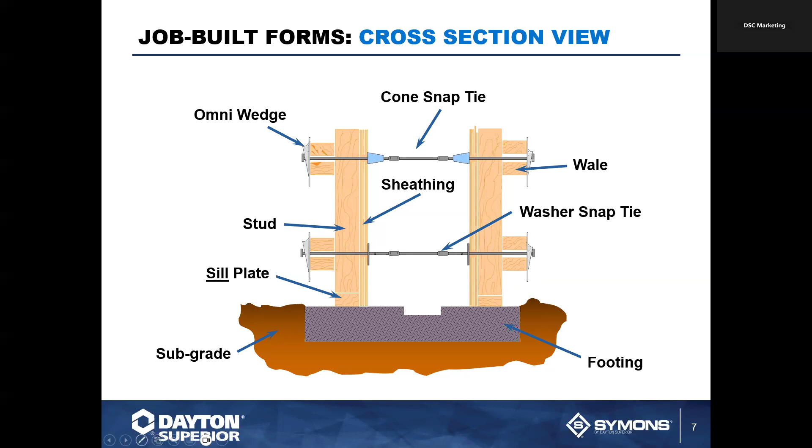Walers and strongbacks - all of these systems we talked about, whether you're talking about the 3/4 inch plywood, the studs, or the wales, they are all called load gathering members. What they do is take the pressure that occurs when you're pouring concrete within the form. You've got to consider the concrete form is the mold of the concrete, so that mold, when you're pouring concrete in, is going to want to push outward, away from where the concrete is being dumped into it. So that's going to create pressure.

The plywood gathers that pressure and transfers it to the stud, and the stud will transfer that to the waler. The waler is going to transfer that load to the tie through the omni wedge in the back that's holding everything together. So the tie will actually be what's supporting all the weight that's pushed on it - it's just that the lumber is all what they call the load gathering parts of the system.

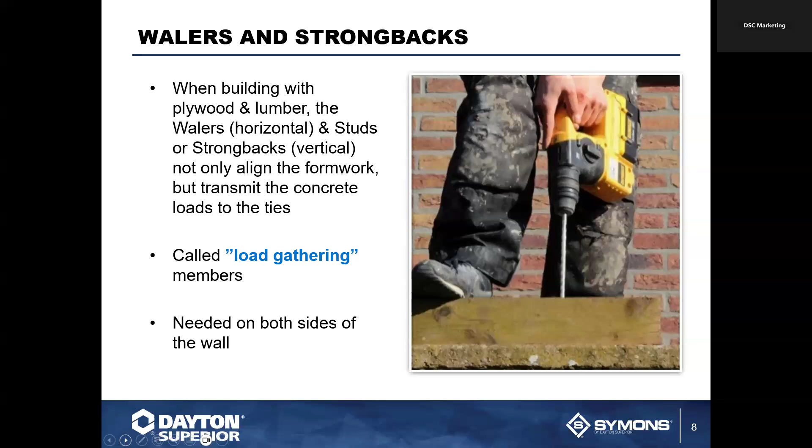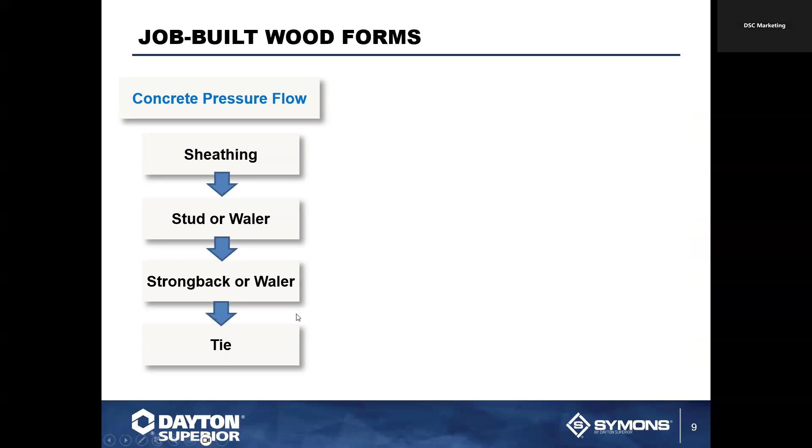Basically, as we talked about, your concrete pressure flow is going to go from your plywood to your stud or waler to your strongback or waler to the tie. This is known as your concrete form pressure. Whether you have either a stud and a wale or a wale and a strong back, both systems are totally acceptable in the marketplace.

It all depends - it's contractor preference, which way he wants to go, how he wants to form things up. Myself, I grew up as a stud and wale guy. Most of my jobs all had studs and wales on them. So, like I said, it's contractor preference.

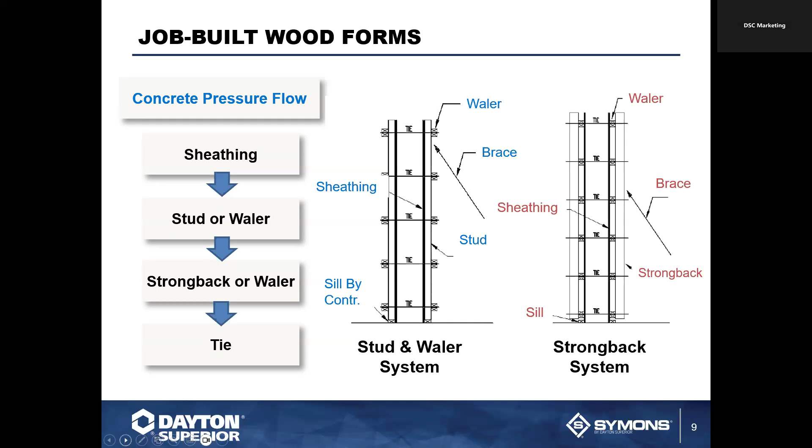On the snap ties, you've got a bunch of different varieties. Most snap ties in today's market typically have a hex head or a penta head on the end, so you can actually use a wrench to break it back.

Now you see those two little flat spots in the form - those are called anti-spin devices. That means once you pour your concrete and it gets hard, you take a wrench - I like to use either a pair of plier vice grips or a plumber's wrench - basically put it on the end of the snap tie and spin it around to snap off the thing. Those anti-spin devices hold the tie in the wall sound, so it will not continually spin. So it will break off.

Now, snap ties are always given a break back, and that is just a little indentation in the wire, or a weak spot, so that when you twist the wire, that area will break first. And that's where your tie will actually give you the break back from the wall surface.

You also have the availability of doing a Jahn forming system. Jahn forming systems are a great system. Typically, you're going to use short end snap ties. You're going to use a standard duty tie with the Jahn system because it is only a 2,250 pound system. But you can also have a heavy duty tie for other systems when you're using like the Omni wedge and other systems available.

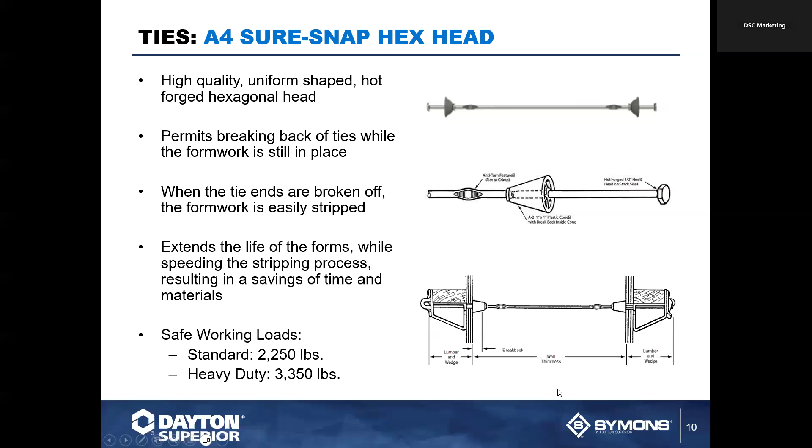The Jahn system, as we referred to, we talked about a little bit here. It is light forming, primarily uses the Dayton short end snap ties, a tie wedge, or Jahn clamps. Now the Jahn clamps typically have to be used with light duty ties because the eccentric on the back there, since it is pressed and heat pressed, is only good for about 2,250 pounds. The tie wedge, on the other hand, can accommodate up to 3,350 pounds.

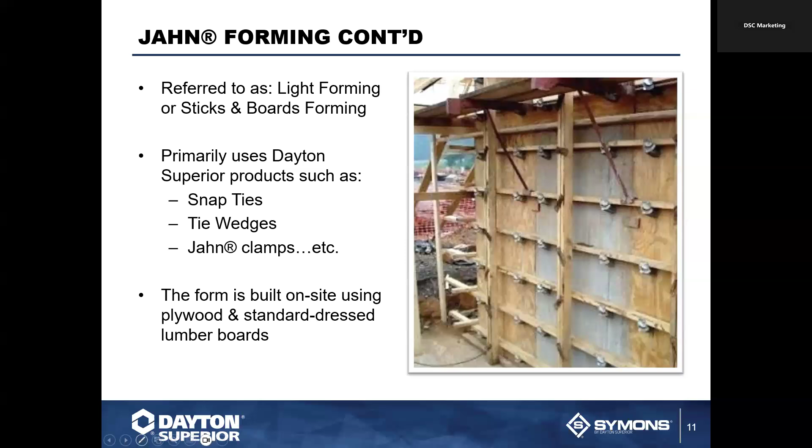The Jahn system primarily is a single waler system. So basically, you're going to put the tie through the plywood once you drill your holes, attach a Jahn A bracket to it, and then put the 2x into it. That 2x will actually carry the load.

Now, it's recommended that every 8 foot you put a strong back, and strong back just basically ties all of the ties in the wall form together, so it's going to help keep it in alignment vertically. I strongly recommend using a strong back at a minimum of every 8 foot.

With the Jahn system, you're going to have a grand total of probably a handful of nails on the project. It's one of those that's called loose sticks and boards for a reason, because you don't have to attach anything with nails. But in certain applications, especially on the outside of the form where you run your walers by and across each other, you're going to want to drop a nail down through the boards to make that connection in the corners.

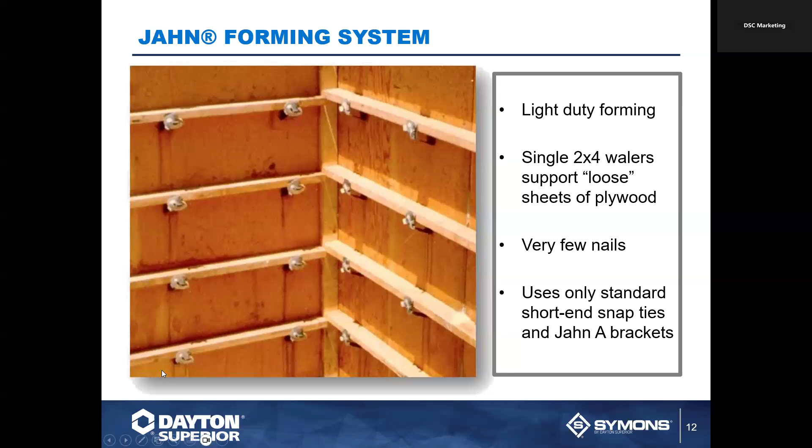Now we also have the Gates system, or the Sherlock system, as we call it here at Dayton. This system uses a little bit different fixture than the snap tie. You see the snap tie there with the break back, the anti-spin, and the long end, and then the hex head. Well, the Sherlock tie is a product very similar.

If you hear the word Gates Camlock, they were the originator of this system. We came up with the Sherlock system about 3 years later. The system itself uses a loop tie, as shown here, with a self-centering plastic cone, has a 1 inch break back, and you can see they also have anti-spin characteristics within the wire already. The loop on the end here is just a different mechanism for actually connecting your load gathering systems to the tie.

So the big problem with this system, if you don't own it already, is that it's rather expensive to get into if you're looking at purchasing products, because the cam lock or Sherlock bracket and what they would call the grasshopper, the strong back bracket, is relatively costly to get involved in. But if you have it, this is a great system for doing light forming.

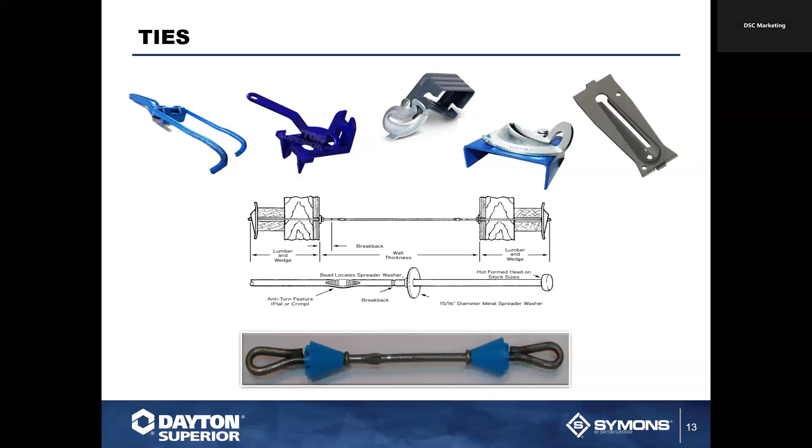When all else fails, and you just don't have a tie where you need to have a tie, or you can't put one through, you can actually use pencil rod. Pencil rod is just that, a smooth piece of wire, usually 1/4 inch or 3/8 are the typical ones. The safe working loads are about 1,100 pounds, 1,125 pounds, and 2,250 pounds.

What you would do is actually slide that pencil rod through your form, attach a rod clamp on the end of it, usually a D12 or D12F are probably two of the most common ones. Once you attach that, you bend the wire up 90 degrees at the end. And on the other end, you attach your rod clamp, but don't tighten it down.

You're going to take that D14 wrench, the tightening wrench, attach it to the wire, and actually tighten it up in place. Then you rotate the tightening wrench around in a circle, and what happens is it will spread out. As it holds onto the wire, it's pushing it, so when you get your desired wall thickness, you can then tighten down your rod clamp.

Once you tighten down that rod clamp, you remove the tightening wrench and bend the wire up 90 degrees. That bend is extremely important, because if you don't have that bend in there, when you start putting pressure on this, that wire will want to elongate a little bit and loosen itself up. That bend actually helps hold that in, which is why we only have a reduced working load of 1,125 or 2,250 pounds.

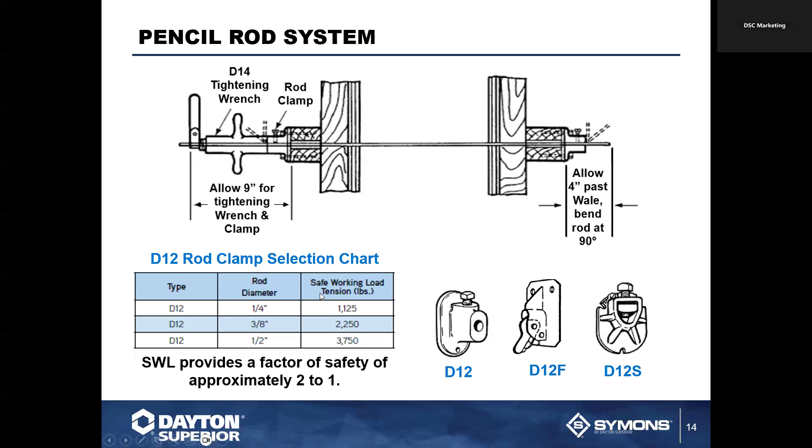We have a light forming product you'll see occasionally on wall slabs, especially single-sided walls. On the back side of the form, especially in an area where you can't remove your formwork, this is a great idea to drop it in on the backside. You can actually use this metal rib feature to pour your wall.

If you have a segmented slab, you can use this to segregate those slabs without additional pours or additional formwork in place. Drop this in place, pour your first section, then come back at a later date to pour your second section, leaving the metal rib in place. It gives you a very good rough surface, which helps the bond or adhesion of the concrete pours together. You can drill this so you can pass rebar through or punch rebar through it.

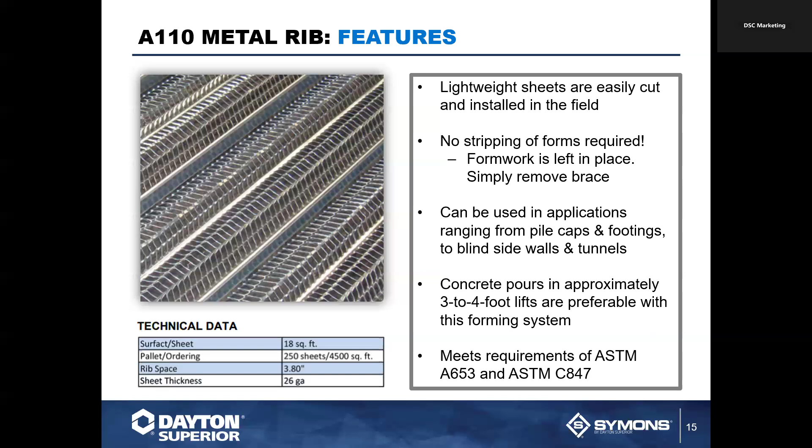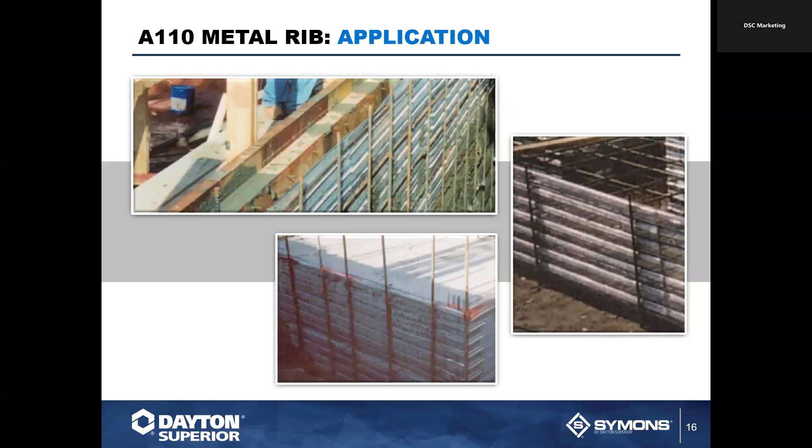This is a very light duty product, but it maintains a very good wall figure, especially on a one-sided wall form. This is one of those products used occasionally on a site - not something you'll use every day, but it comes in handy when you have to form a wall where you can't remove or strip the form from the back side because you're too close to a structure next to you, etc. So this is a great alternative, and if you have to segment or segregate any pour sections, this is also a great tool for that.

And we have ties that will accommodate that. We have ties with snap tie ends. We can also get combination ties so that we can do a specialty snap tie end with a coil tie on the other end, so you may be able to attach it to coil rod or some other insert cast in place. We can also do the combination tie to match up to a Steel-Ply forming system - Steel-Ply being a system we're going to talk about here in a minute that came from Symons Corporation. You'll see that this tie is one of the most common ties in the marketplace.

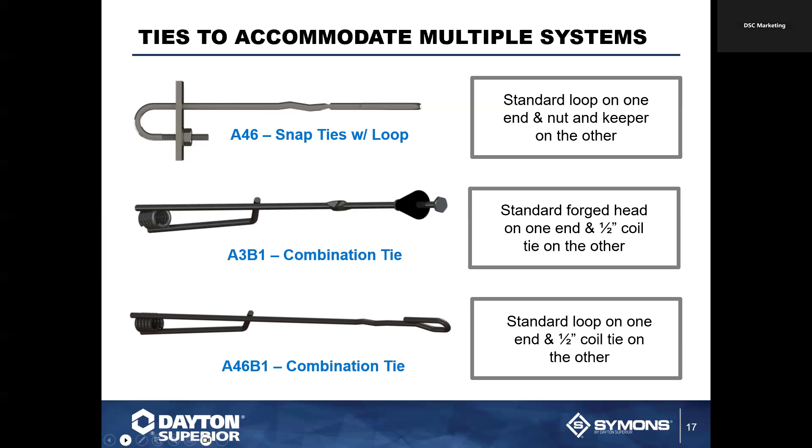Some of the other items we came out with in the last 8-9 years have been the B6R rebar hook, which enables you to tie off to rebar in your casting slab, to tie off to it with a coil rod product. There are other types of coil rod within these forming systems available, but only coil rod can be used with any inserts.

So we talked a little bit about Steel-Ply being the most common forming system in the marketplace. Realistically, when you're looking at light commercial forming systems, Steel-Ply and the Steel-Ply panel systems, being a handset system, probably make up a little bit over 50 to 60% of the marketplace. You have panel sizes typically of 24 inches, and fillers come in 4 through 22 with even increments.

That means every 4, 6, 8, 10. There's an oddball 5-inch in there which I don't know why, but there is. We also have steel fillers available in 1 inch, 1.5 inches, and 2 inch. Just FYI, there's a 30-inch wide adjustable column form. A lot of times you don't use that because when you use the adjustable column form, you have to drill through your plywood, which gets costly and expensive.

We do have standard heights of 3, 4, 5, 6, 8, 9, and now 10. 2 foot and 7 foot are available, but for purchase only. Here's the steel filler - they have dado slots every 2 inches. So if you have a step filler within your project, like from a garage to a foundation, you can have a step filler in there. It gives you those dado slots so you can adjust your formwork within 2 inches of where you have to have it. That's also available with a 4-inch piece.

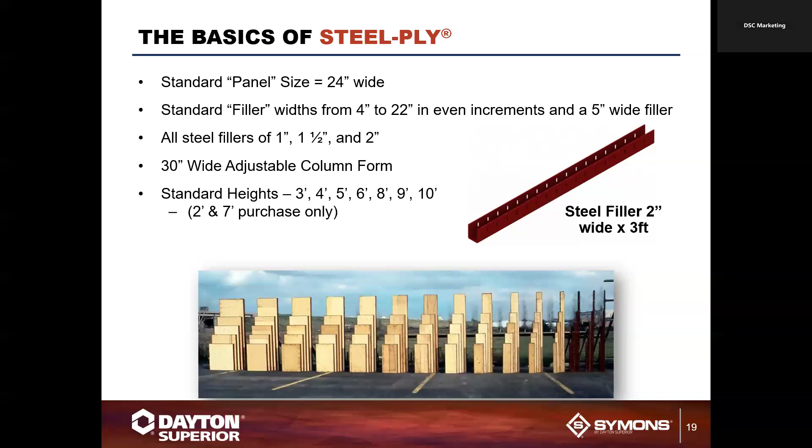Now, when we're talking about key accessories for this, you've got your wedge bolt. Two wedge bolts will make an attachment - one goes horizontally across the form, the other vertically down through it. Can't get much simpler than that. You also have the one-piece waler clamp that comes in 6 inches down from the top of the form. That's a vertical alignment piece, there just to help you align the form vertically. And then obviously the turnbuckle for plumbing the form as you get ready to pour the concrete.

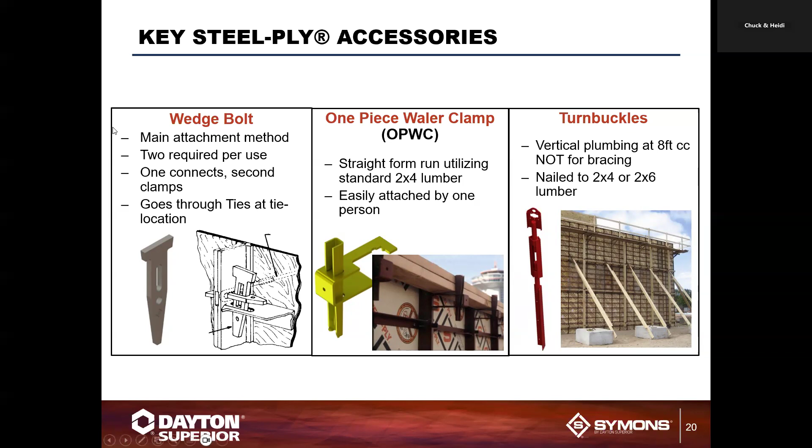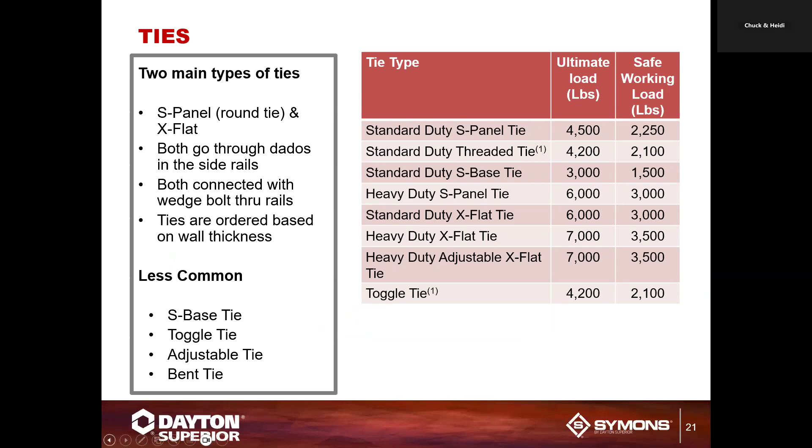Ties - typically you've got your S panel tie and X flat tie. Those come in standard 4,500 pound ultimate loads, or 2,250 pound safe working loads. You can also get a heavy duty version, which is 6,000 and 3,000. We also have other ties available: S-Base ties, toggle ties, adjustable ties, and a bent tie if needed within the criteria. Big differences between the two main ties - the X flat tie has a 1/4 inch breakback, while the S panel tie has a 1 inch breakback.

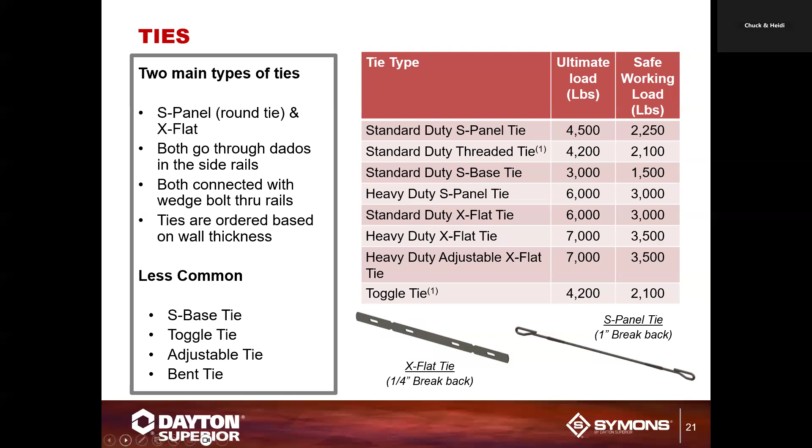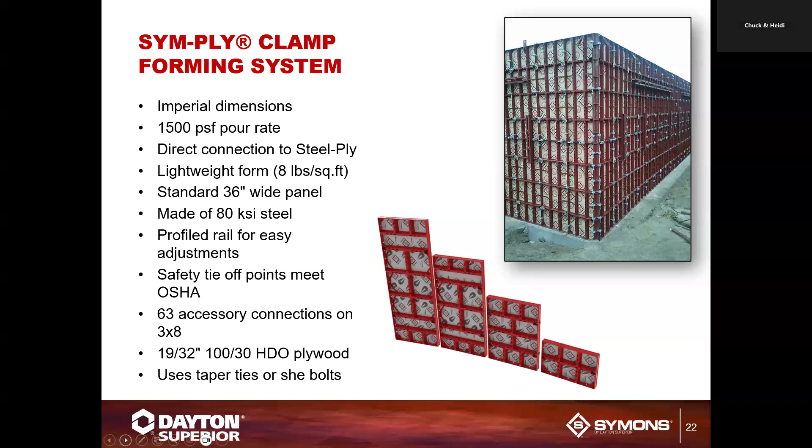Next system up is our Sym-Ply clamp system. Imperial dimensions - it's the only clamp system in the marketplace that is imperial. 1,500 pound pour rate, light duty clamps. The clamps only weigh about 3.6 pounds a piece. Typically, standard sizes are 36 inches wide up to 8 foot high. You can go 8 foot, 6 foot, 4 foot, and 2 foot in height for the panels, and they typically come in standard widths of 36 inches, 24 inches, 18 inches - I'm missing a size there, I'm thinking. But there's a limited number of sizes, and you can place those all together. They're compatible with Steel-Ply, so you can match the two systems up to accommodate each other.

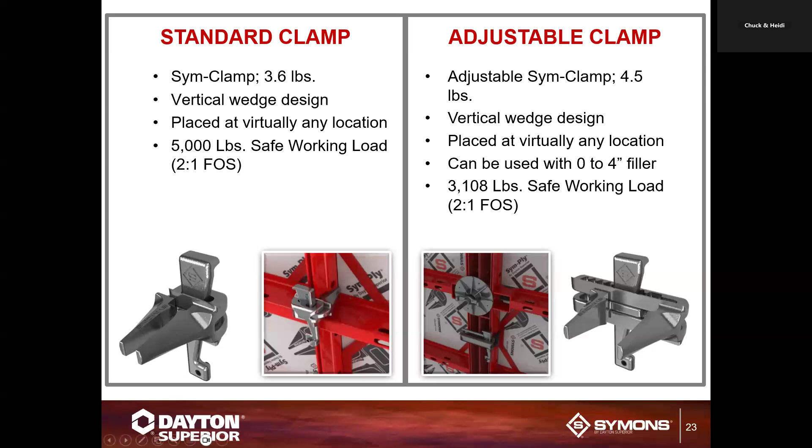The Sym-Ply ties and tie plates are typically fairly simple. You've got a 15 mm tie - we call it 15 mm, roughly 5/8, but it's 15 mm Euro thread, meaning it has a 2.5 inch thread per inch on each end. You'll have the same washer plate on the backside, which as standard is a 15 mm 7-inch circular plate with a nut on top. You also have availability of a cast nut bearing washer and a 50 kip cast if you're using an Imperial taper tie, so you'll see different variations down through here. The 15 mm is kind of taking over the job site market until you get into the really heavy forms, where you'd use the standard taper ties.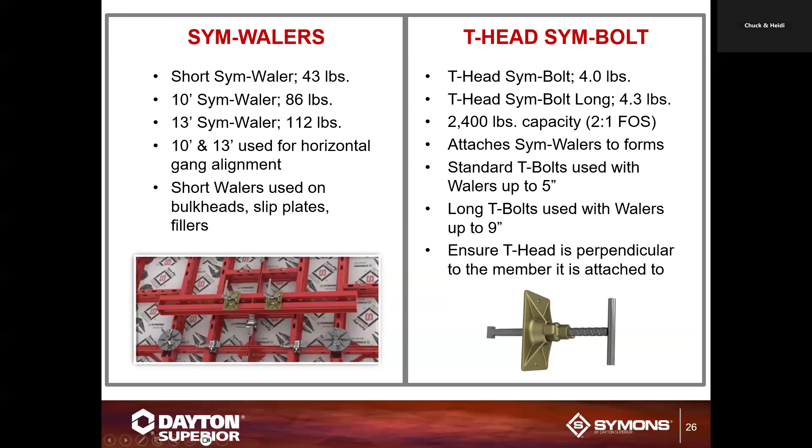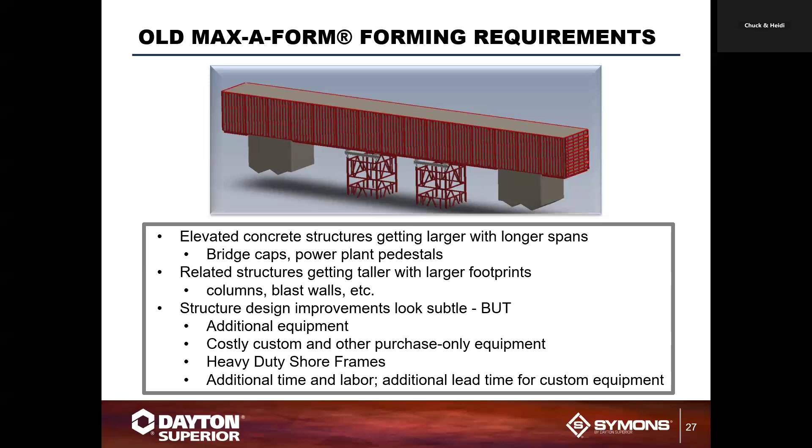Now, let's talk about the big granddaddy of them all, the old Max-A-Form system. Great heavy duty forming system - steel panel, steel ribbed, steel face. Great for doing heavy civil and bridge construction. One of the things it did lack, though, was self-spanning capability. Because of how the ribs were rolled and the overall design, it would actually sag, so you had to have shoring in between to help support the system in place. Anytime you get a taller system in place, your shoring would always become an issue, so you had to make sure that was accounted for.

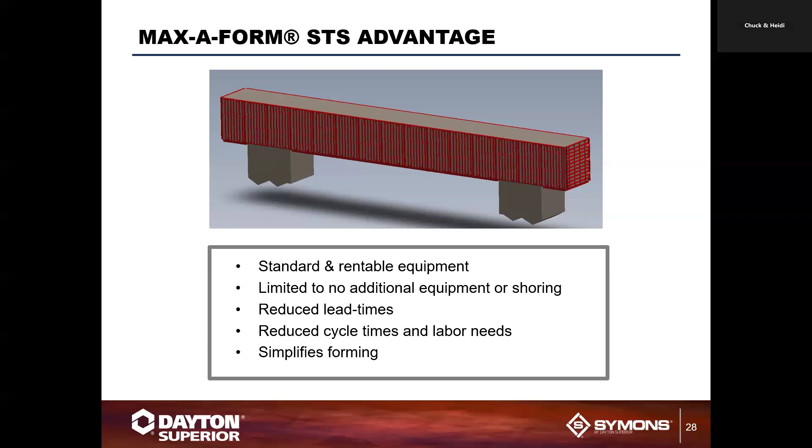Well, about 10 or 12 years ago, we came out with the new Max-A-Form STS - it's Max-A-Form on steroids. It's a self-spanning system because it gives you a greater moment within the concrete form. You get standard, rentable equipment with limited to no additional equipment or shoring needed, since this will do it with self-spanning. Reduced lead times, reduced cycle times, which means money in your pocket - you don't have that labor cost. It makes forming quick and easy. You get moment capacity 30% higher than any competitive system in the marketplace - we're talking 2,000 PSF with this system. It's available up to 8 foot by 20, up to 12 foot wide, and the 8 foot by 20 foot panel will give you somewhere around 2,000 PSF.

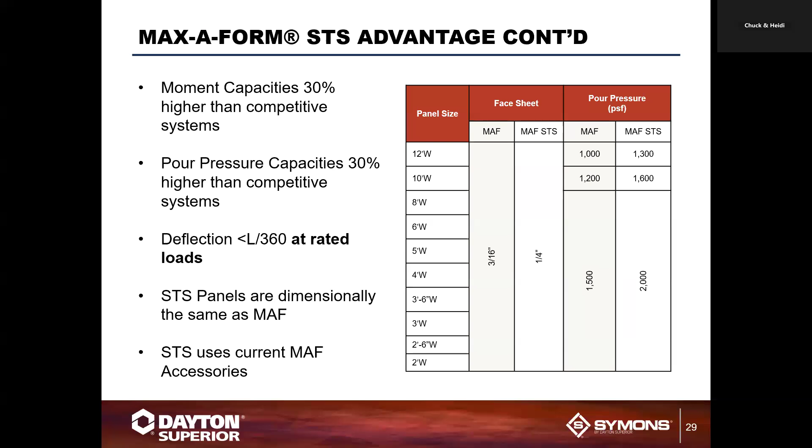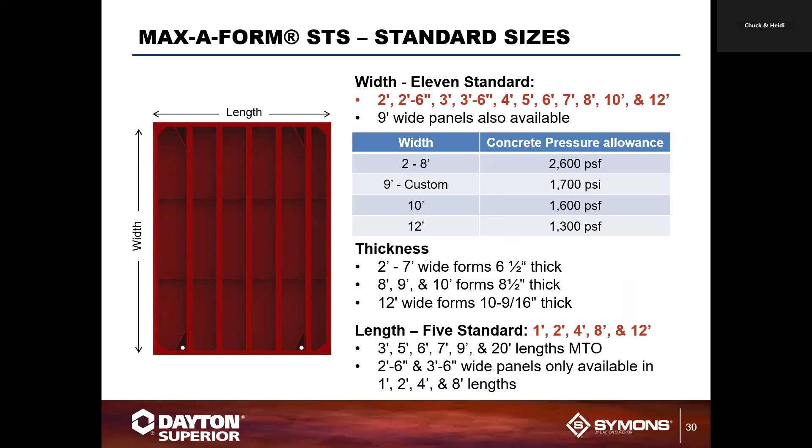With eleven standard, you're also looking at a grand total of over 100 different sizes of panels that are available within the system. You have a heavy duty quarter inch steel plate on the front face of it, which increases longevity and increases the moment strength of this system.

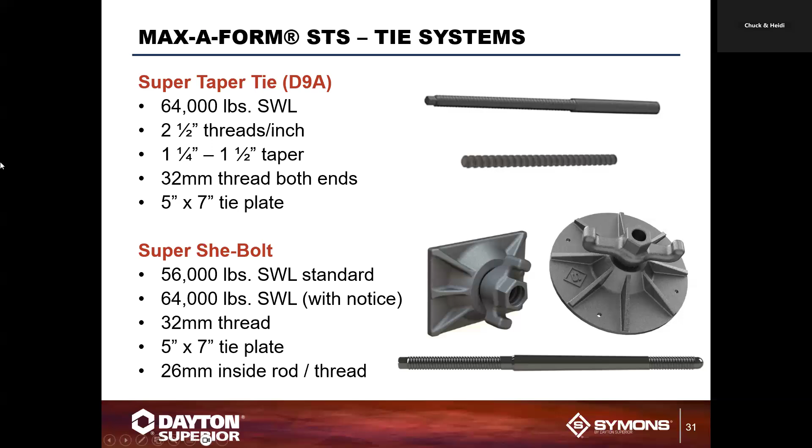You have the heavy duty taper ties, the 64,000 pound. This also has a 2.5 thread per inch, inch and a quarter to inch and a half, and it does have 32 millimeter thread on both ends. 5x7 tie plate typically is our standard. We also have a super she bolt up to 56,000 pounds, standard working load of 64,000 with notice. With notice, we need to check it out before we can actually accommodate that. So you're talking very heavy duty and strong system going through.

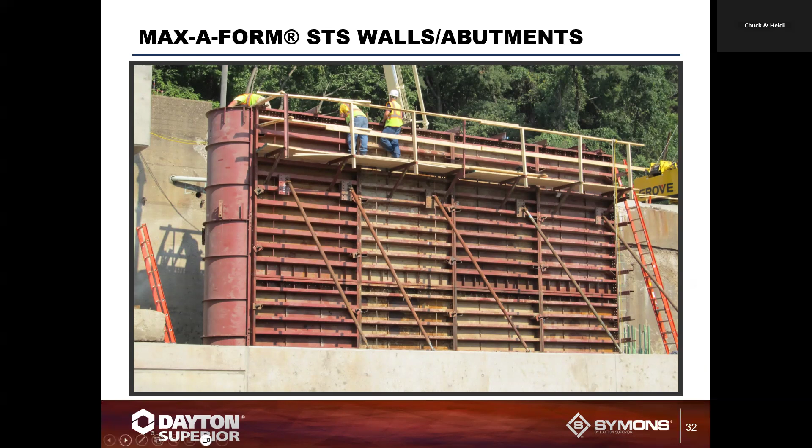As you can see, here's a pier that's actually being poured here with a bull nose on it, mating up to our Tower Max system. This system here is a great system for your bridge and highway applications. You can also do columns with this system and pier caps.

Columns is especially exciting because you don't have to have a tie. You can go with the tieless system. The Max-A-Form system, because of the strength and capacity of it, you can use a single panel for that column, no ties required.